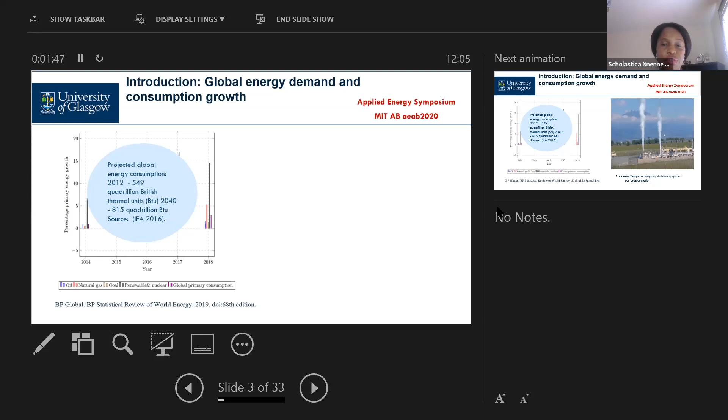To buttress this, IEA 2016 carried out a research, and a projection over a 28-year period shows about 48% increase in the demand for energy. So as energy continues to grow, it's assumed that natural gas demand and consumption would also grow.

Now, the challenge is when there is an emission. An example is shown here of a compressor station in Oregon where there is a disruption on the network, and methane, which is the major composition of natural gas, is emitted into the environment.

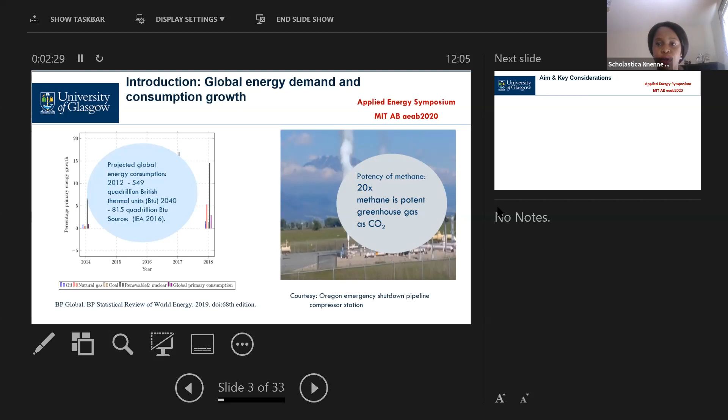Now, the challenge is the potency of this methane. Research shows it's about 20 times more potent than CO2 in greenhouse gas emission. So as much as we could reduce the methane emission on a gas network, it gives value to that particular supply chain. The aim is to optimize for gas loss and carbon emissions during disruption on the network node.

The disruption we're talking about is unplanned disruption, which is exogenous, and oftentimes, because there are no plans put in place, it becomes difficult to manage the emission of gas loss. The assumption is that when there's interference on the network, there's a shutdown at the network node, and losses of gas are also incurred during this shutdown.

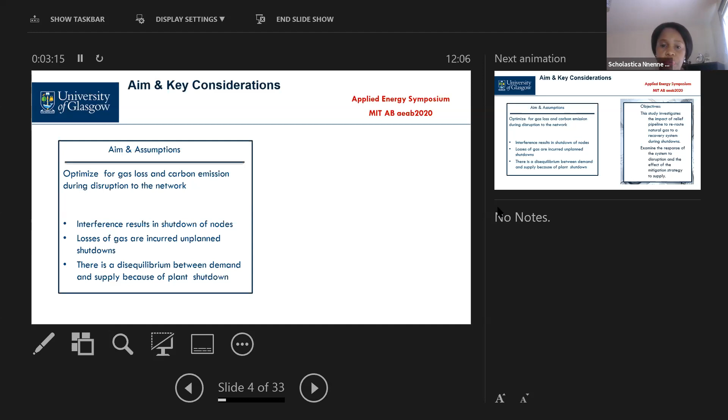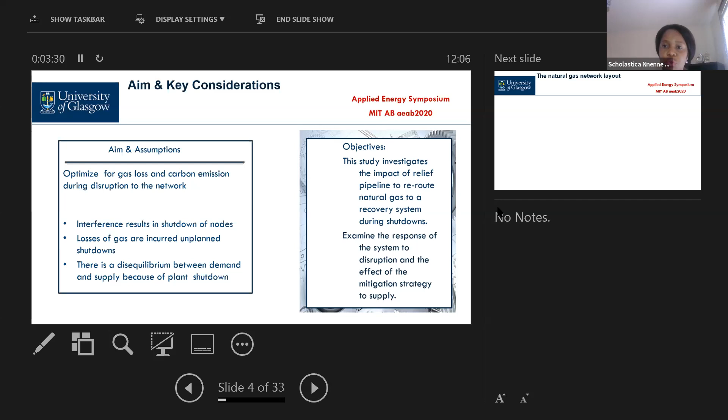It's a case study based research, and there's a disequilibrium between demand and supply. The objective is to investigate the impact of a proposed relief pipeline, which will be used to reroute gas from the main line to the cell line. We're investigating the impact and examining the response of the system to disruption and the effect of this mitigation strategy.

When there is a disruption between the upstream and the midstream, especially at the compressor station, because of the pressure from the upstream, there's a blowdown in the compressor station, and gas is emitted. So can we introduce a relief pipeline, an alternative pathway between the inlet and outlet node, to contain this gas and reduce the quantity of emission to the environment?

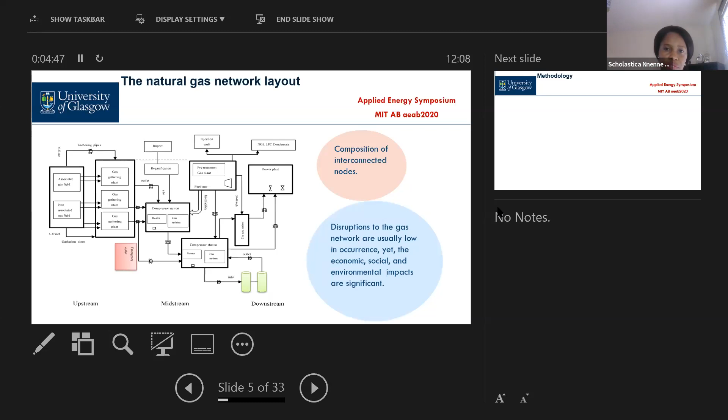The gas network is interconnected and complex, and these disruptions rarely occur, but when they do, the economic, social, and environmental impact is usually significant.

The methodology is to develop a mathematical algorithm, mixed integer linear programming, and run it on the gas network using a CPLEX solver, to allocate the appropriate pressure and mass flow rate at critical nodes. Then we look at different scenarios and compare the results from them.

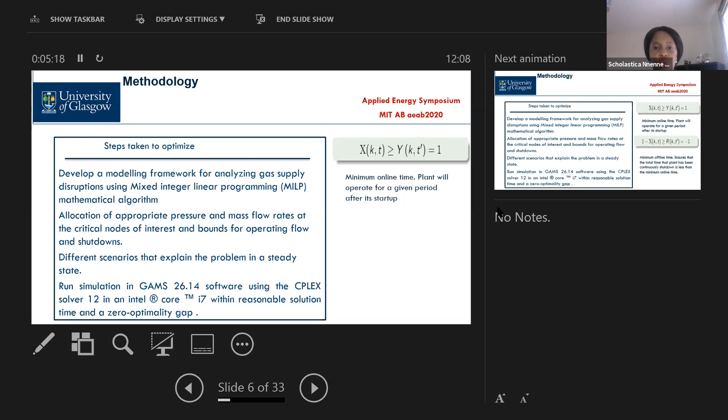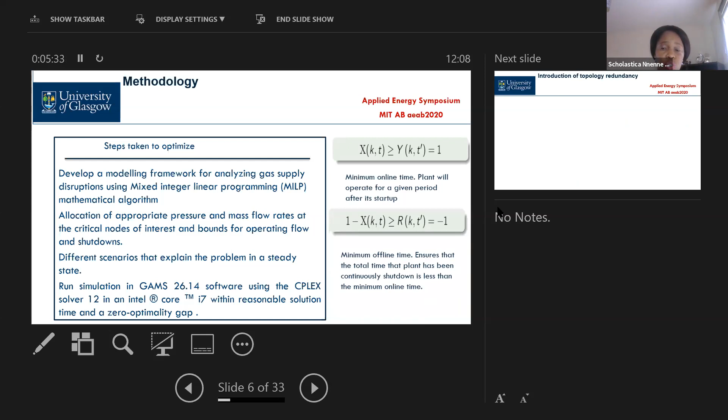Looking at the binary variable, the first shows the plant's minimum online time - how much time the plant is expected to operate after startup. For shutdown, we want to ensure the minimum continuous shutdown time is less than the minimum online time. So we're introducing this topology redundancy, the relief pipeline, as a mitigation effect.

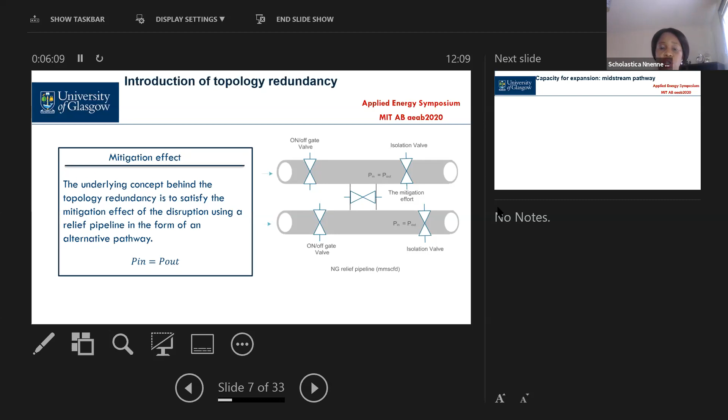The underlying concept is to satisfy the mitigation effect of the disruption using this relief pipeline. You have the inlet and outlet valves shut, and then the introduction of this relief pipeline to reroute the gas from the main line to the seal line, so there's a continuous flow and a reduction in loss during the shutdown.

First, we analyzed the baseline when the plant has a startup in the compressor. We analyze the performance of the compressor by multiplying the mass flow rate by the operating time. There are 4 compressors in the compressor station, and the performance is more steady towards the tail end, looking at the first graph.

Then, when there is a startup and the relief pipeline has been introduced, we optimize that by also multiplying the mass flow rate by the operating time.

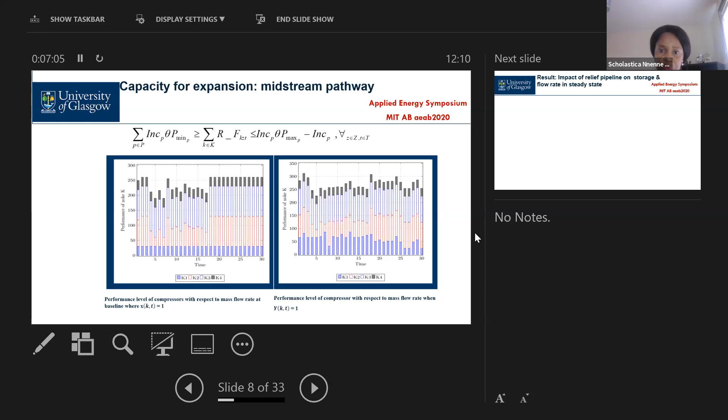You'll find out that K1, which was very flat in the first graph, is showing a better performance. Even though they did not reach the optimum value, the performance of K1 and K2 had increased significantly. So the impact of the relief pipeline on storage and flow rate.

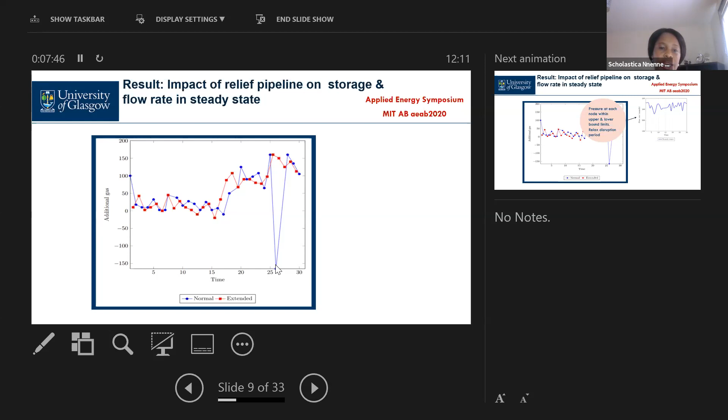Now we're using this relief pipeline at a capacity of 1.3 to 1.5, meaning 30% to 50% of the main line. That's the capacity of the relief pipeline, using it as line parking for temporary storage. You find out how this storage also affects the overall flow rate or throughput. At this point there's a significant drop, which is the impact of the disruption, when the line parking cannot take much more gas for temporary storage.

Now when this is analyzed using the compressor, the plant node, at steady state with equal capacity, you find out that the pressure at each node within the upper and lower bound limits are actually introduced, and then we relaxed the disruption period. We got this output, which we analyzed subsequently, and then decided to alter the capacity of the plant node by also bringing in the pressure at each node within the upper and lower bound limits, and we got this output here.

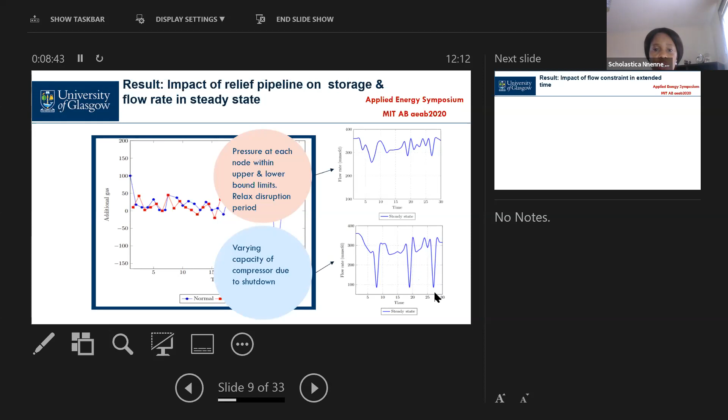So significantly, the time period where there's a shutdown at T8, 19 and 27, there is also a huge impact, because at the shutdown time periods which were introduced, there's a significant drop in the flow rate.

A different scenario that we introduced is without a flow constraint, but this time around with an extended time series. So we had to separate the normal time period, extended time period, and then have a cumulative time period to study the flow rate without a flow constraint.

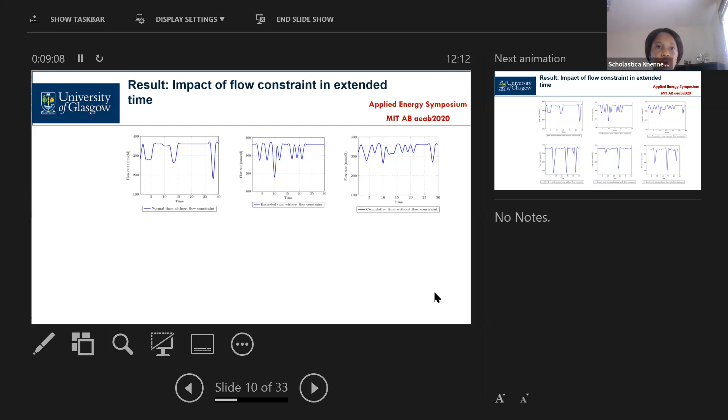And then we decided to introduce a flow constraint in the same time series, where we had to separate extended from normal and then the cumulative. The result of these graphs is summarized in the subsequent slide.

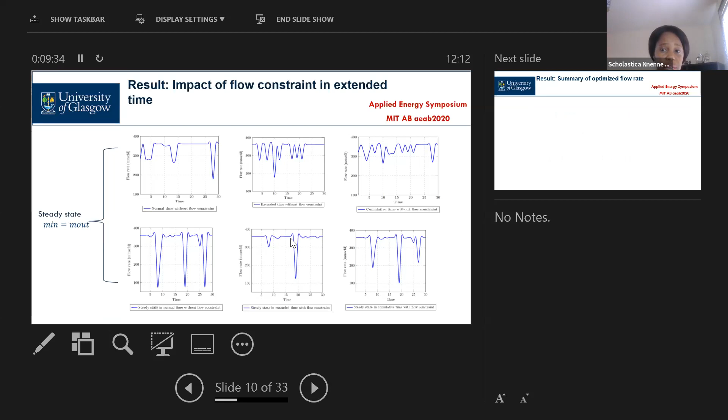Remember, this is also a steady state, so we expect that what goes in is what comes out. The performance in the first graph, where capacity was flat, showed 327.67 mmSCFD, better than when the capacity was varied, even though the shutdown times were the same.

And then when we introduced the flow constraint, we had 336.08. But when the flow constraint was completely removed, we had a better optimized performance flow rate of the network.

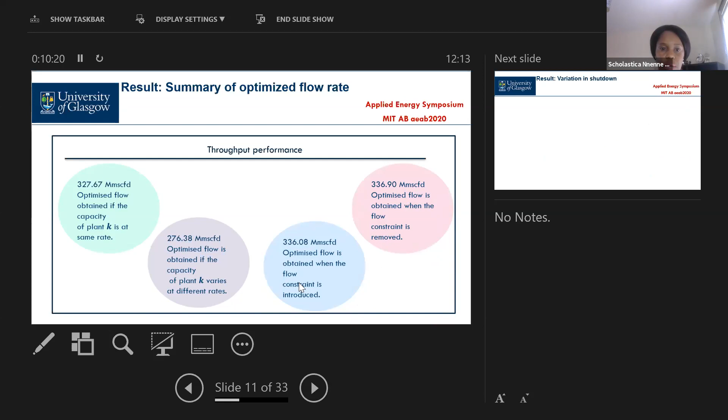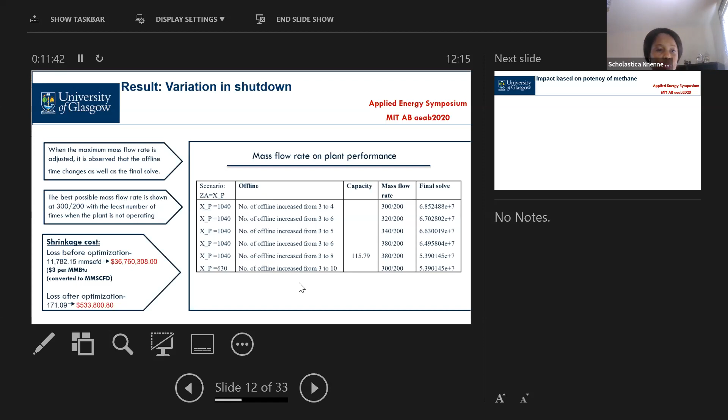So when we look at the total output performance, we find that a reduced mass flow rate shows a reduction in loss and shrinkage and a higher throughput. And the best possible mass flow rate is 300/200 for the main line.

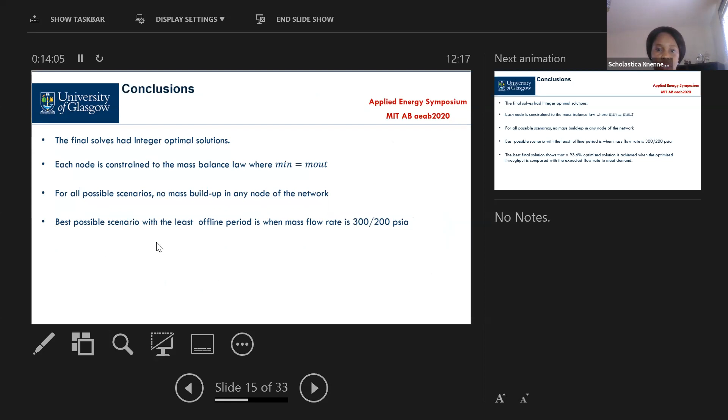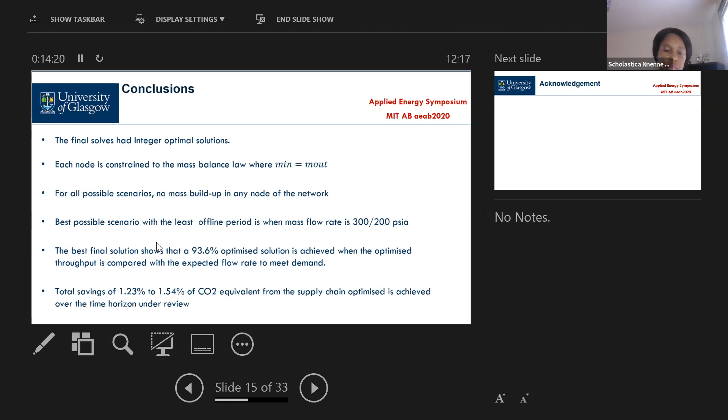And the best possible scenario is when we have 300/200 psi as the pressure on the main line, and the best final solve gives us a 93.6% optimized solution. There's a total savings of 1.23% to 1.54% of CO2 equivalent based on the optimized solution.